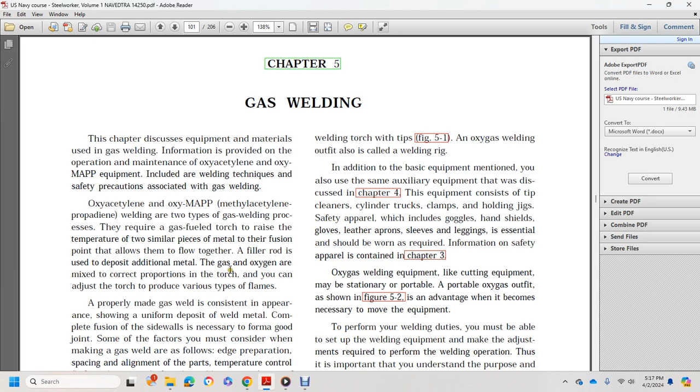You can adjust the torch to produce various types of flames. A properly made gas weld has a consistent appearance showing uniform deposit of welding material with complete fusion, the necessary form of a good joint. Factors to consider when making a gas weld include edge preparation, spacing, alignment of the parts, and temperature control before, during, and after the welding process.

The angle of the torch and position of the tip, filler rod, flame adjustment, and torch manipulation all matter. In some cases flux is needed to remove oxidized slag from molten metal and protect the puddle from atmospheric contamination.

When selecting the joint section for gas welding, the edges of the plate joint are uniformly melted with the heat of the torch. For welding heavier sheets and plates, you have to fill it using filler metal at the edge of the heavier plate, which may be beveled to permit penetration to the base of the joint. Both filler metal and base metal are melted and solidify to form one continuous piece.

For welding light sheet metal, filler metal is usually not necessary. The edges of light sheet metal are flanged at the joint so they flow together to form one solid piece as you melt them. This covers oxy gas welding equipment.

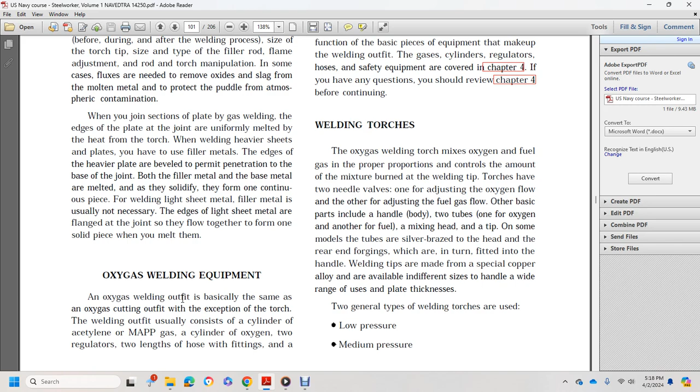An oxy gas welding outfit is basically the same as an oxy gas cutting outfit with the exception of the torch. The welding outfit usually consists of an acetylene gas cylinder, oxygen cylinder, regulators, two lengths of hose with fittings, and a welding torch with tips. An oxy gas welding outfit is called the welding rig.

In addition to the basic equipment, the same auxiliary equipment discussed in chapter 4 is used, consisting of tip cleaners, cylinder trucks, clamps, holding jigs, and safety apparel which includes goggles, hand shields, gloves, aprons, and sleeve leggings. This essential safety apparel and required information is contained in chapter 3.

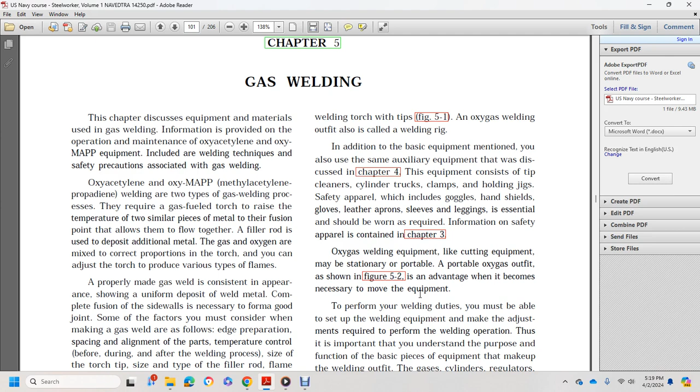Oxy gas welding equipment, like cutting equipment, can be stationary or portable. A portable oxy gas outfit, shown in figure 5.2, is advantageous when it becomes necessary to move the equipment. To perform welding duties, you must be able to set up the welding equipment and make adjustments required to perform welding operations. It's important to understand the purpose and function of the basic pieces of equipment that make up the welding outfit.

Gas cylinders, regulators, hose, and safety equipment are covered in chapter 4. If you have any questions, you should review chapter 4 before continuing.

The welding torch is the oxy gas torch. The welding torch mixes the oxygen and fuel in the proper proportions and controls the amount of the mixture burned at the welding tip. Torches have two needle valves, one adjusting oxygen flow and the other adjusting fuel gas flow.

Other basic parts include the handle, the body with two tubes—one for oxygen, another for fuel—a mixing head, and a tip. Some models have tubes that are silver brazed with the heads and rear end forgings, which are in turn fitted within the handle. Welding tips are made of a special copper alloy available in different sizes to cover a wide range of plate thicknesses.

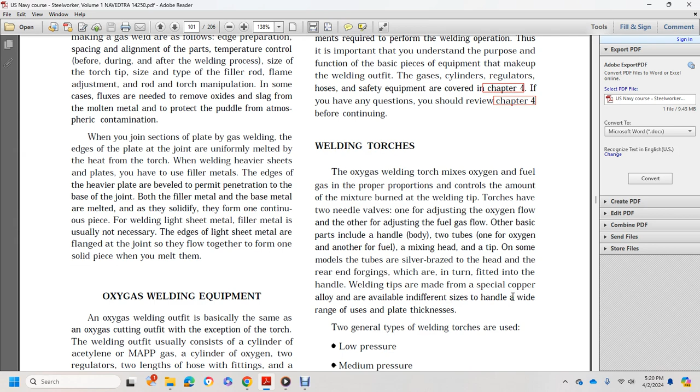There are two general types of welding torches: low pressure and medium pressure.

The low pressure torch is also known as an injector torch. Fuel gas pressure is about 1 psi (pound per square inch), while oxygen pressure ranges between 10 to 40 psi, depending on the size of the torch tip. A jet of relatively high pressure oxygen produces the suction necessary to draw the fuel gas into the mixing head.

Welding tips may or may not have separate injectors in the tip. A typical mixing head of a low pressure, or injector type, torch is shown in figure 5.3.

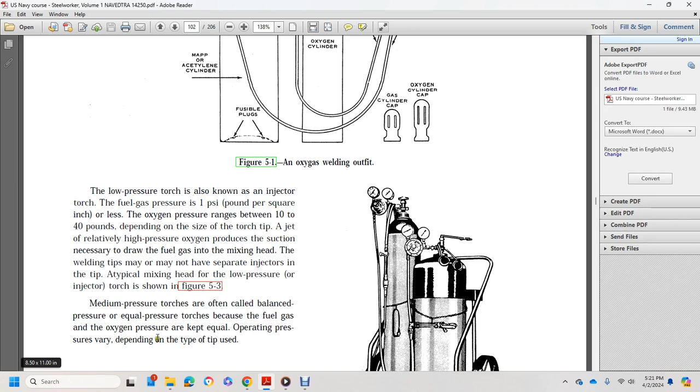Medium pressure torches are often called balanced pressure or equal pressure torches because the fuel gas and oxygen are kept at equal pressure. Operating pressures depend on the type of tips used. Danger: the acetylene fuel gas pressure must never be allowed to exceed 15 psi. Acetylene pressure may become very dangerous between 15 and 29, and self-explosive at 29.4 psi.

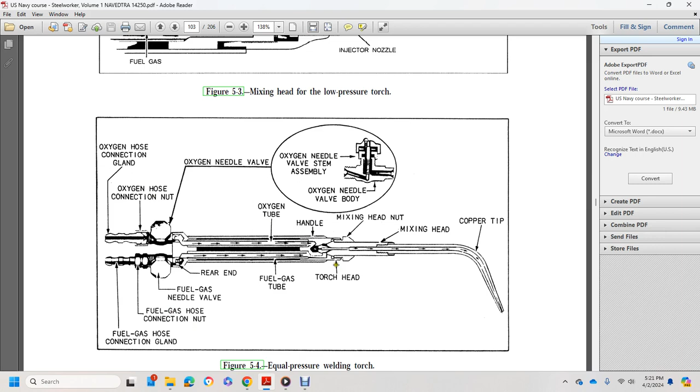Equal pressure welding torch, oxygen connection gland, fuel gas hose connection gland, fuel gas hose nut, oxygen connection nut, fuel gas needle valve, oxygen tube, fuel gas handle, torch head, oxygen needle valve stem, oxygen needle valve body, mixing head nut, mixing head, copper tip.

Typical equal pressure welding torches are called general purpose torches, shown in figure 5.4. The medium pressure torch is easier to adjust than the low pressure torch. With equal pressure gas pressure, you'll be less likely to get flashbacks, which are covered in chapter 4.

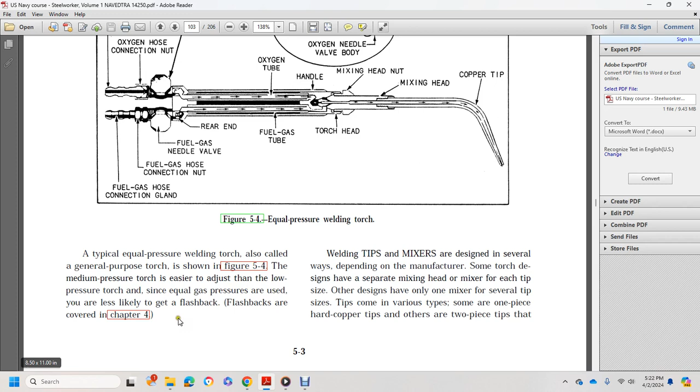Welding tip mixers are designed several ways depending on the manufacturer. Some torch designs use separate mixing heads and mixers for each tip type and size, while other designs have only one mixer for several tip sizes. Tips come in various types: some are one-piece hard copper tips, others are two-piece tips that include an extension tube making the connection between the tip and the mixing head. These removable tips are made of hard copper, brass, or bronze.

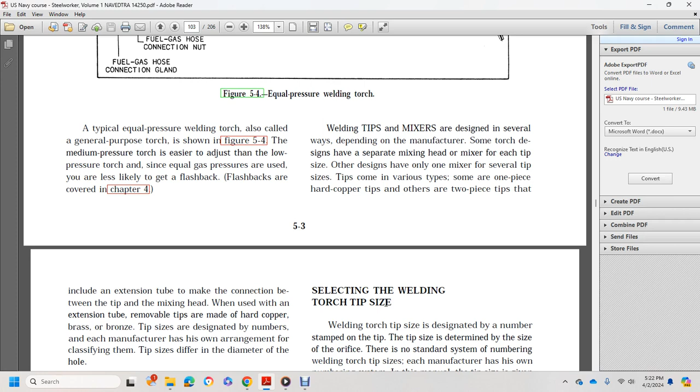Tip size is designated by numbers. Each manufacturer has its own arrangement for classifying them. Tip sizes differ in the diameter of the hole.

Filler rods refer to filler metal used with gas welding and brazing. In certain electrical welding processes, the filler rod is not part of the electrical circuit; its only function is to supply filler metal to the joint.

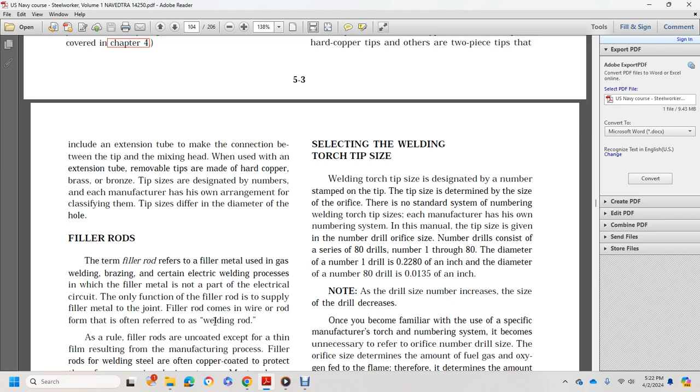Filler rod comes in wire or rod form, but is often referred to as welding rod. As a rule, filler rods are uncoated, except for the thin residue of the manufacturing process. Filler rods for welding steel are often copper coated to protect them from corrosion during storage.

Most rods are furnished in 36 inch lengths, with a variety of diameters ranging from 1/32 inch to 3/8 inch. Rods used for welding cast iron vary from 12 to 24 inches in length and are frequently square rather than round. We determine the rod diameter given the job and the thickness of the metal being joined.

Except for rod diameter, you select the filler rod based on the specification of the metals being joined. Federal, military, and naval specifications apply to all federal agencies, military establishments, or the Navy respectively. Filler metals are presently covered by one or more of these three types of specification.

Eventually all Navy specifications will be rewritten as military specs. For this reason, some of the specifications for welding material presented in this section may subsequently be published as a military rather than a Navy specification.

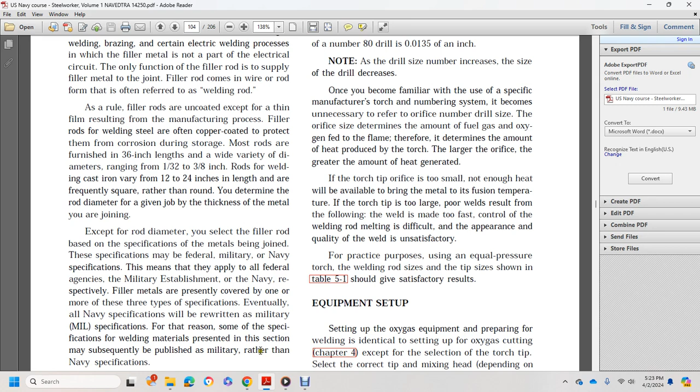Many different types of rods are manufactured for welding ferrous and non-ferrous metals. In general, the welding shop stocks only a few basic types that are suitable for use in all welding positions. These basic types are known as general purpose rods.

Operation and maintenance of oxygas equipment. This section discusses the basic procedures involved in setting up the oxygas equipment, lighting it off, adjusting the flame, and securing the equipment. Information is also provided on the maintenance of oxygas equipment.

On selecting the welding torch tip size: the welding torch tip size is given by the number stamped on the tip, with the tip size determined by the size of the orifice. There is no standard system for numbering welding torch tips; each manufacturer has its own numbering system manual.

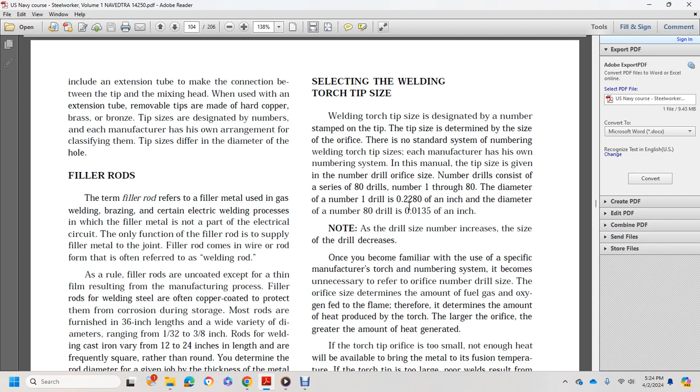Tip size is given by the number of the drill used, and the number of drills consists of a series — for example, an 80 drill series numbers 1 through 80. The diameter of the number 1 drill is 0.2280 inches, while the diameter of the number 80 drill is 0.0135 inch. As the drill size number increases, the size of the drill actually decreases.

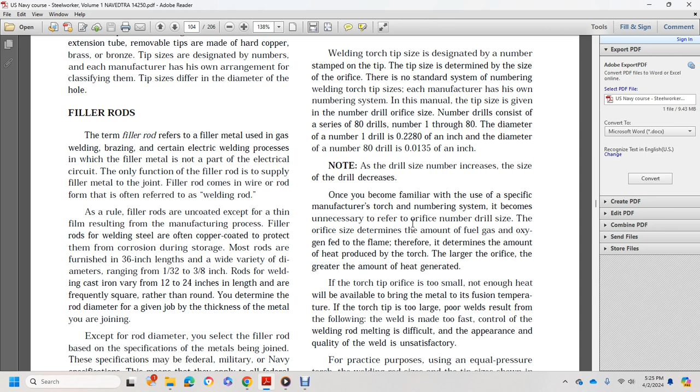Once you become familiar with the use of a specific manufacturer's torches, it becomes unnecessary to refer to orifice number drill size. The orifice number, or drill size of the orifice, determines the amount of fuel gas and oxygen fed to the flame, and therefore determines the amount of heat produced by the torch.

The larger the orifice, the greater the amount of heat generated. If the torch orifice is too small, not enough heat will be available to bring the metal to fusion temperature for the torch tip.

Using too large a tip results in the following: the weld is made too fast for control as the welding rod melts, and the resulting difficulty in appearance and quality of the weld is unsatisfactory.

For practice purposes, using the equal pressure torch with the welding rods and tip sizes shown in table 5.1 will give satisfactory results.

Tighten the assembly and adjust it to the proper angle. After the desired adjustment has been made, tighten the tip. Depending on the type of equipment, some are tightened with a wrench, while other types only require hand tightening as required.

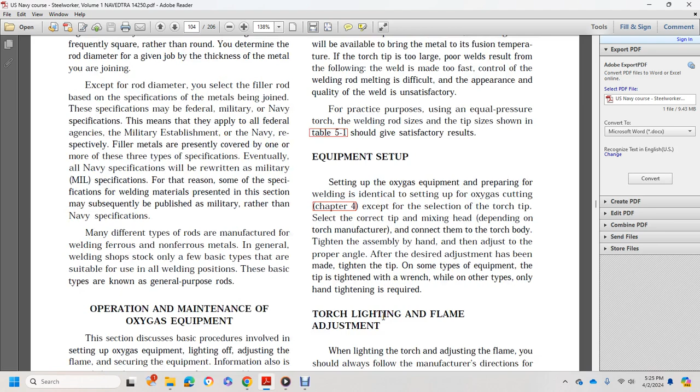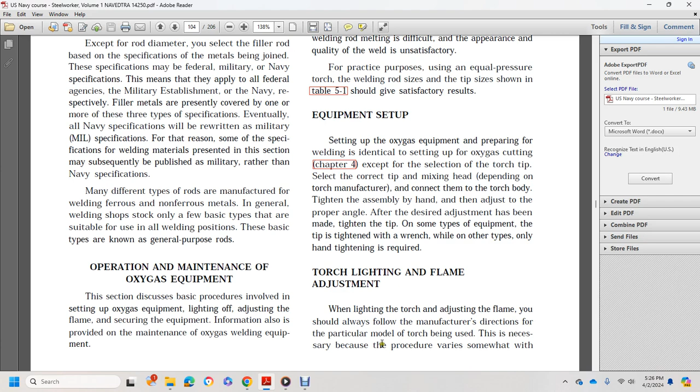Torch lighting and flame adjustment: after lighting the torch, adjust the flame. You should always follow the manufacturer's directions for the particular model of torch being used, since procedures vary somewhat between different types of torches, and in some cases even between different models made by the same manufacturer.

After lighting the torch, adjust the flame according to the type of metal being used and the depth of coverage required. The different types of flames are covered in Chapter 4.

A carbonizing flame is adjusted for welding high carbon steel with a hard-faced weld, while non-ferrous alloys are welded with a neutral flame if the correct flame is used for welding mild steel. The flame produces a molten puddle that is quite clear on the metal, flowing without boiling, foaming, or sparking. Always adjust for the neutral flame before moving to an oxidizing or carbonizing flame mixture.

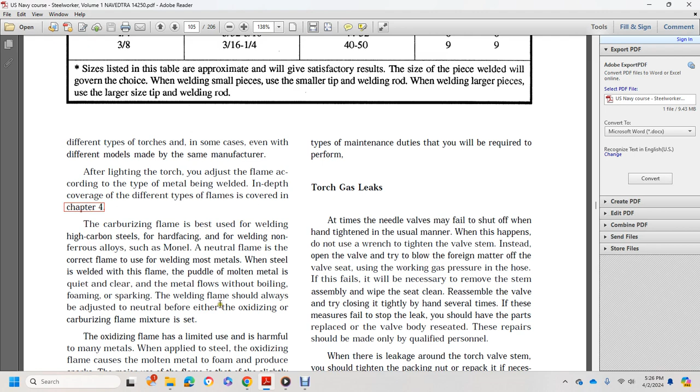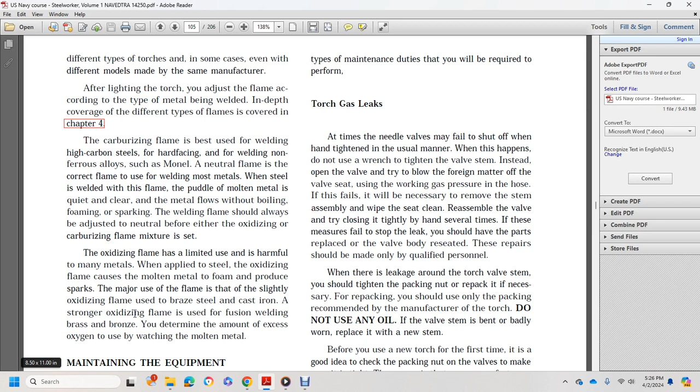An oxidizing flame is limited to use on certain metals, applied to steel, causing the molten metal to foam and spark. The major use is a slightly oxidizing flame for brazing steel and cast iron, while a strong oxidizing flame is used for fusion welding brass and bronze. The amount of excess oxygen used determines how the molten metal is watched.

Maintenance of the equipment: for welding equipment to operate efficiently and give useful life, you must properly perform maintenance and upkeep. Your responsibility for maintaining oxygas welding equipment will not require you to make major repairs.

If major repairs are needed, you are responsible for seeing that the equipment is removed from service and turned into the repair section. You will be briefed on some of the common maintenance duties you will be required to do.

Torch gas leaks: at times needle valves may fail to shut off when hand tightened in the usual manner. When this happens, do not use a wrench to tighten the valve stem. Instead, open the valve and try to blow foreign matter out of the valve seat using working gas pressure in the hose.

If this fails, it will be necessary to remove the stem assembly, wipe the seat clean, reassemble the valve, and try closing it shut tight by hand several times. If this fails to stop the leak, you should have the parts replaced or the valve body reseated. These repairs should be made only by qualified personnel.

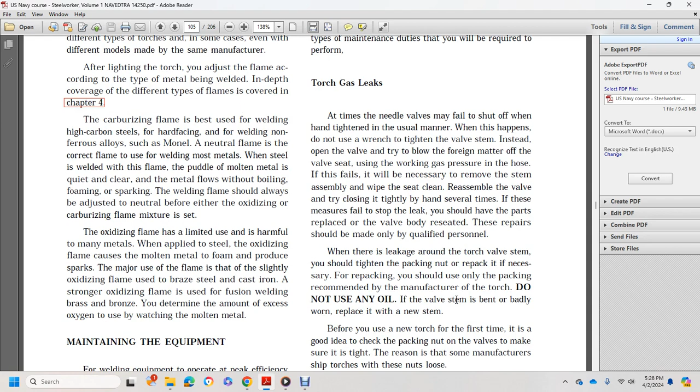When there is leakage around the torch valve stem, tighten the packing nut and repack if necessary. If repacking, use only the packing recommended by the manufacturer, and do not use any oil. If the valve stem is bent or badly worn, replace it with a new stem.

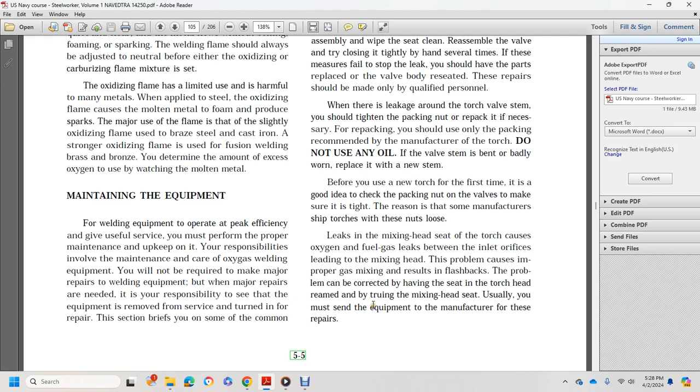Welding tips are subject to considerable abuse and must be kept smooth by cleaning the tip orifice for satisfactory performance. When cleaning the welding tip, you must be careful to ensure that you do not enlarge or scar the orifice.

Carbon deposits or slag must be removed regularly to ensure good performance. Avoid dropping and dragging the tip, because the seat of the joint may be damaged, or the flame end of the tip may be damaged if allowed to come in contact with the welding work or bench. Such failure or damage can roughen the end of the tip and cause the flame to burn with a flickering, unstable appearance.

Some welders prefer to use a number drill sized to the tip orifice to clean the welding tip. The number drill size must be chosen carefully so the orifice is not enlarged, bell-mouthed, reamed out, rounded, or otherwise deformed.

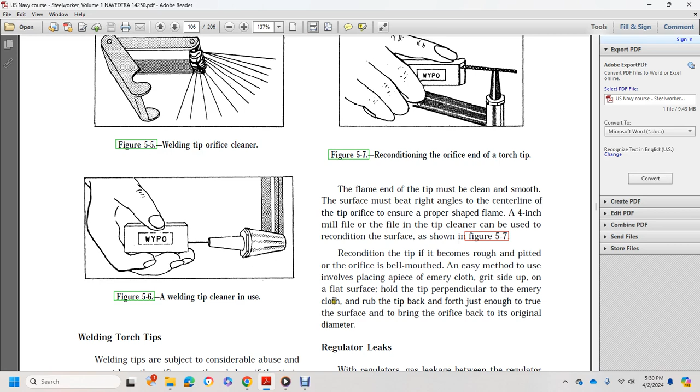Regulator gas leakage occurs between the regulator seat and nozzle. The most common type of trouble is often referred to as regulator creep, where the problem is the pressure gauge gradually rising without moving the adjusting screw.

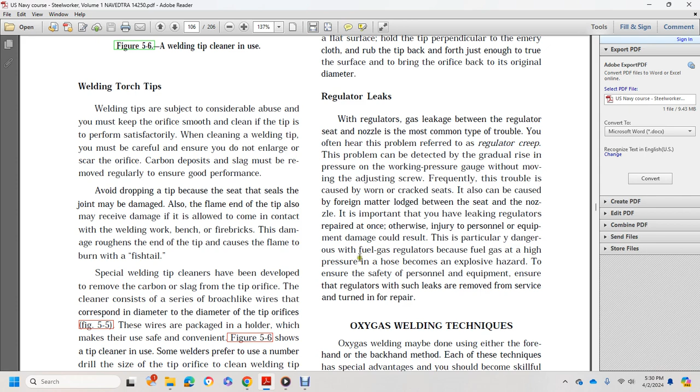Frequently, the trouble is caused by a worn or cracked seat. It can also be caused by foreign matter lodged between the seat and the nozzle. It's important to have leaking regulators replaced promptly, otherwise personal and equipment damage could result, particularly with dangerous fuel gas regulators, because the high pressure fuel gas in the hose becomes an explosive hazard. To ensure the safety of personnel and equipment, regulators with such leaks must be removed from service and turned in for repair.

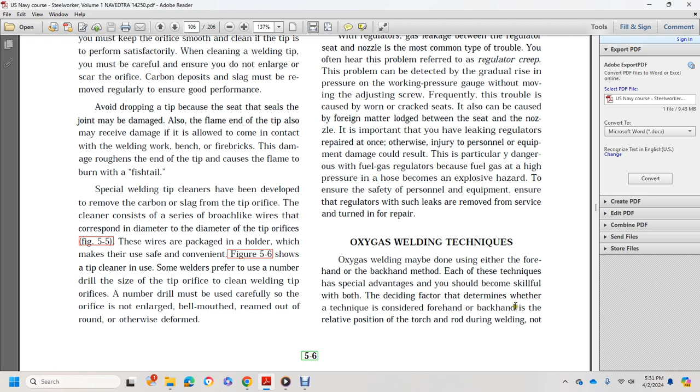Oxy-gas welding techniques: oxy-gas welding is done using either the forehand or backhand method. Each technique has special advantages, and you should become skilled with both. The deciding factor determining whether a technique is forehand or backhand is the relative position of the torch during welding. The direction of the welding pass depends on the type of joint and the position needed to control the parts of the weld.

Forehand welding, shown in figure 5.8, is often called the puddle ripple weld method. The flame is kept ahead of the weld in the direction the weld is being made, with the flame pointing in the direction of travel. The torch tip is held at an angle of about 45 degrees to the work, with the flame positioned to preheat the edge of the weld.

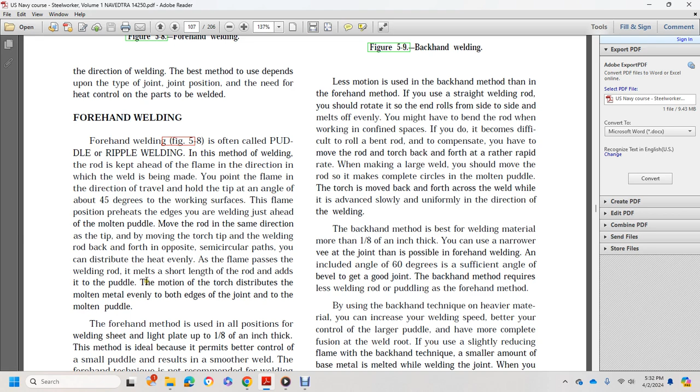Adjust the torch at the bevel and move the rod in the same direction as the tip. The welding rod is moved back and forth in a circular pattern opposite the torch motion, to condition the heat evenly as the flame passes over the weld. Short lengths of rod motion, combined with the torch's motion, distribute the molten metal evenly across both edges of the joint in the molten puddle.

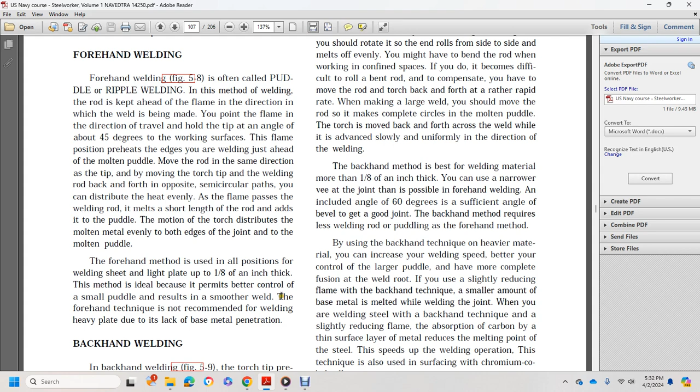In backhand welding, the torch tip precedes the rod in the direction of the weld, with the flame pointing back at the molten metal to complete the weld. The welding tip should make an angle of about 60 degrees with the plate or joint being welded, and the end of the welding rod is placed between the torch tip and the molten puddle.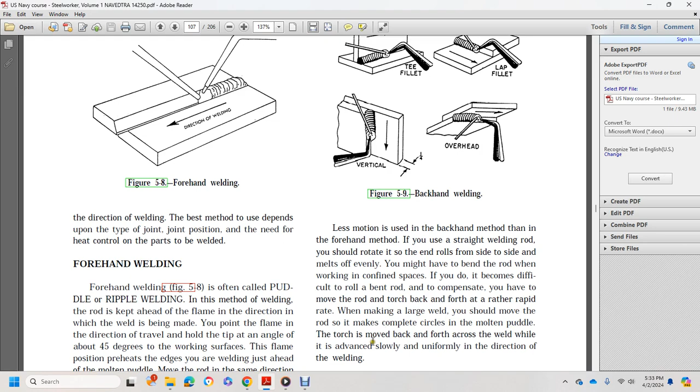The backhand method is best for welding material more than 1/8 of an inch thick. You can use a narrower V at the joint than with forehand welding, with an included angle of 60 degrees, a sufficient angle with a bevel for a good joint. The backhand method requires less welding rod and puddling than the forehand method.

By using the backhand technique with heavier materials, you can improve welding speed with better control of the larger puddle, giving complete fusion of the welding rod.

If you slightly reduce the flame with the backhand technique, a small amount of carbon from the flame is absorbed into the thin surface of the base metal while welding the root joint. This reduces the melting point of the steel and increases the speed of the welding operation. This technique is used in surfacing with chromium-cobalt alloys.

Multi-layer welding is used in order to avoid carrying large molten metal puddles on thick plates and pipe, since large puddles are difficult to control. Concentrate on getting a good weld at the bottom of the V on the first pass, then on the next pass concentrate on getting good fusion on the sides of the V.

With the previous layer as a guide, the final layer is easily controlled, and a smooth surface of the weld has the advantage of refinement. The previous layer's succeeding layers have an effect like heat treating the weld material, allowing one layer to cool to a black heat before it's reheated, improving the ductility of the welded metal. If this added quality is desired for the last layer, an additional succeeding layer is deposited and then machined off.

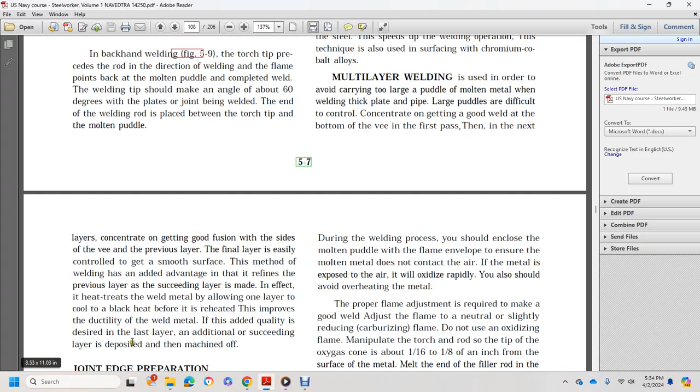Joint edge preparation: sheet metal is easily melted and does not require special edge preparation. For welding operations involving plate, joint edge preparation and proper spacing between edges are important factors. The thickness of the plate determines the amount of edge preparation required.

Square edges can be butted together and welded. You can use this type of joint on plate up to 3/16 of an inch thick, and for plate from 3/16 to 1/4 of an inch thick a slight root opening between the parts is necessary to achieve complete penetration.

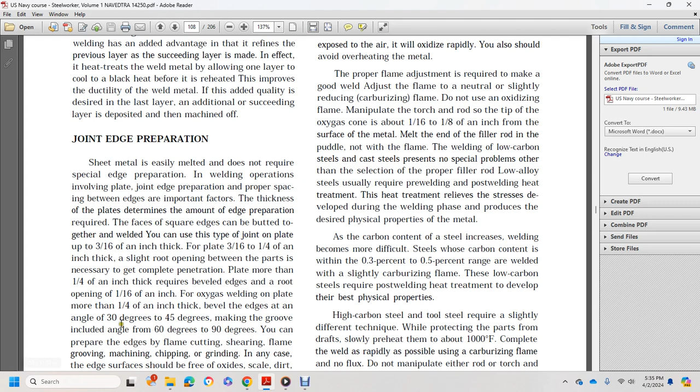Plate more than 1/4 inch thick requires beveled edges with a root opening of 1/16 of an inch for oxy-gas welding. Bevel the edges at an angle of 30 to 45 degrees, making a groove with an included angle of 60 to 90 degrees. You can prepare the edge by flame cutting, shearing, flame grooving, machining, chipping, or grinding.

The edge surface must be free of oxide scale, dirt, grease, or other foreign matter. Plate of 3/8 to 1/2 inch thick can be welded from one side only, but thicker sections should be welded with edges prepared on both sides.

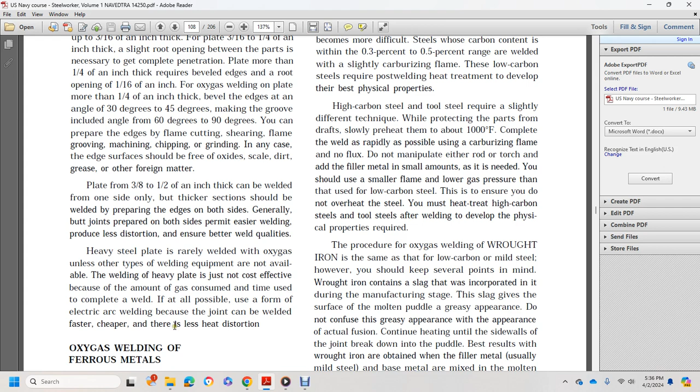Generally, butt joints should be prepared on both sides to permit easier welding, produce less distortion, and ensure better weld quality. Heavier steel plate is rarely welded with oxy-gas unless other types of welding equipment are not available, and welding heavy plate is not cost effective because of the amount of gas and time consumed for a complete weld. Electrical arc welding is preferred because the joint can be welded faster, cheaper, and with less distortion.

Oxy-gas welding of ferrous metals: low carbon steels, low alloy steels, cast steel, and wrought iron are easily welded by the oxy-gas process. Flux is not necessary when the metal's oxide melts at a lower temperature than the base metal.

During the welding process, you can cover the molten metal with a flame envelope to ensure the molten metal does not contact the air. If the metal is exposed to the air, it will oxidize rapidly and overheating of the metal should be avoided.

Proper flame adjustment is required to make a good weld. Adjust the flame to neutral or slightly reducing carburizing flame; do not use an oxidizing flame. Manipulate the torch to hold the inner cone 1/16 to 1/8 inch from the surface of the metal, and keep the end of the filler rod in the puddle, not in the flame, while welding.

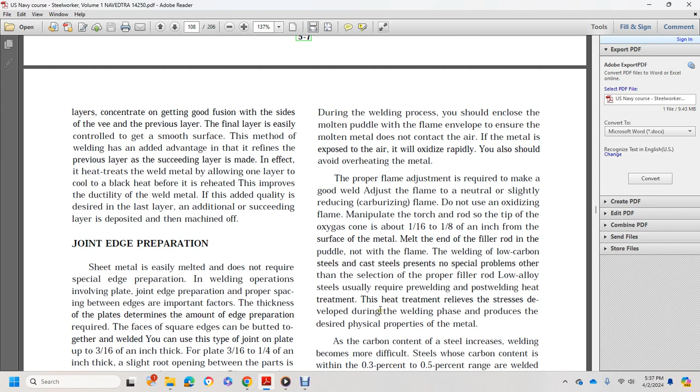Low carbon steel presents no special problems in the selection of the proper filler rod. Low alloy steel usually requires pre-welding and post-welding heat treatment. The heat treatment will relieve the stress that develops during welding and produces the desired physical properties of the metal. As the carbon content of the steel increases, welding becomes more difficult.

Steel whose carbon content is within 0.3% to 0.5% range is welded with a slightly carburizing flame. Low carbon steels will most often require post-welding heat to develop the physical properties. High carbon steel tools require a slightly different technique, protecting the parts from drafts.

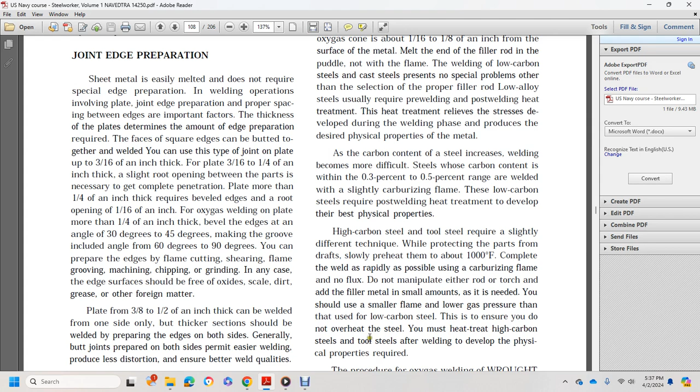Slowly preheat them to about 1000 degrees and complete the weld as rapidly as possible, using a carburizing flame with no flux. Do not manipulate either the rod or torch; add filler metal in small amounts as needed. Use a smaller flame and lower gas pressure than that used for low carbon steel to ensure you do not overheat the steel. You must heat treat high carbon steel tools after welding to develop the physical properties required.

The procedure for oxygas welding wrought iron is the same as for low carbon mild steel; however, you should keep several points in mind. Wrought iron steels contain slag that was incorporated during the manufacturing stage. This slag gives the surface of the molten puddle a greasy appearance. Do not confuse this greasy appearance with the appearance of actual fusion.

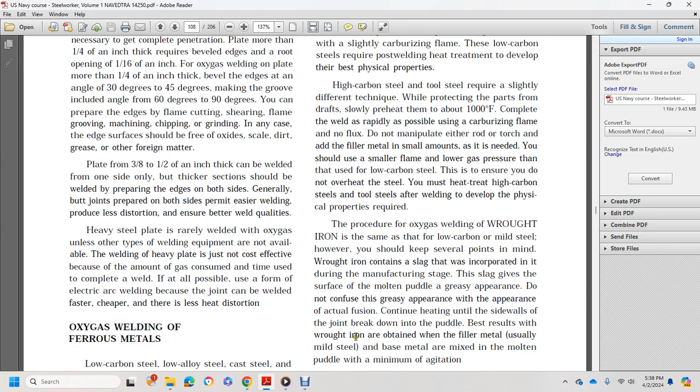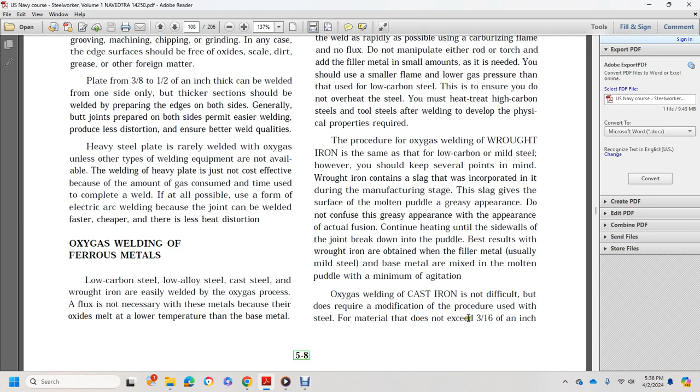Oxygas welding of cast iron is not difficult, but it does require a modified procedure compared to steel. For material not exceeding 3/16 of an inch thick, you do not make a V-groove. Metal between 3/16 and 3/8 of an inch thick should have a single V-butt joint with an included angle of 60 degrees. For more than 3/8 of an inch thick, use a double V joint with a 60-degree angle.

Add filler by directing the inner cone of the flame against the rod instead of dipping the tip into the puddle. Filler metal should be deposited in layers not exceeding 1/8 of an inch thick. Upon completion of the weld, you must stress relieve the weldment by heating it to a temperature between 1100 and 1150 degrees Fahrenheit, then cooling it slowly. Oxygas welding of cast iron gives a good color match and good machinability.

However, the color match is not essential. Cast iron repairs can be made more easily and economically by braze welding.

Oxy-gas welding can be used with chromium, nickel, and stainless steels. As a rule, oxy-gas welding is used only on light sheet; heavier pieces of steel are usually joined by one or more of the electrical arc welding processes. For material 20 gauge, or 4/100 of an inch, or less in thickness, a flange equal to the thickness of the metal is turned up, then welded without filler metal.

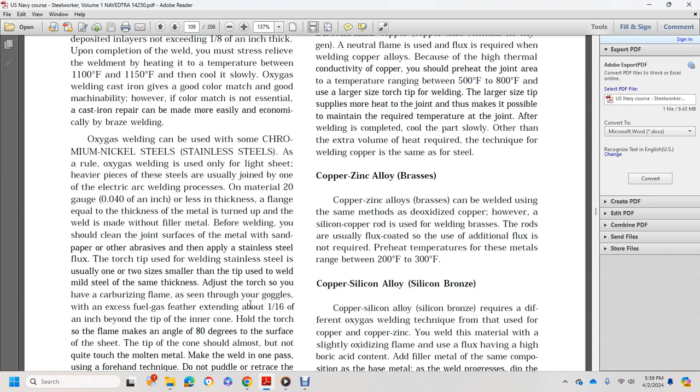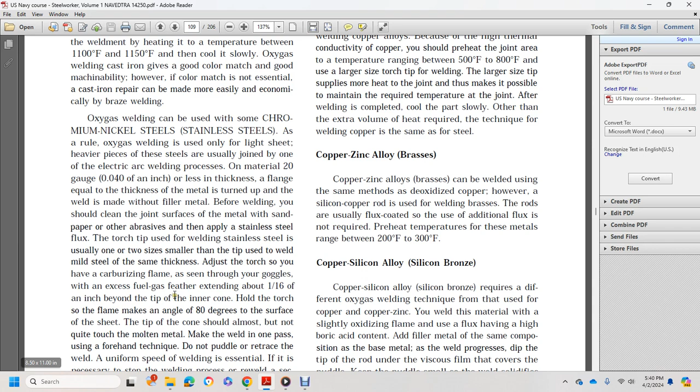Hold the torch so the flame makes an angle of about 80 degrees with the surface of the sheet. The tip of the cone should almost but not quite touch the molten metal. Make the weld in one pass using the forehand technique. Do not puddle or retrace the weld; a uniform speed of welding is essential.

If it becomes necessary to stop the welding process, wait until the entire weld has cooled before you reweld the section.

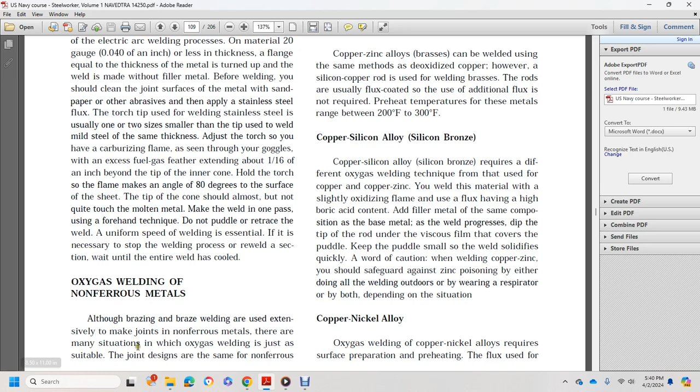Pure copper can be welded using an oxygen torch. High joint strength requires either deoxidized copper that contains no oxygen, using a neutral flame and the flux required.

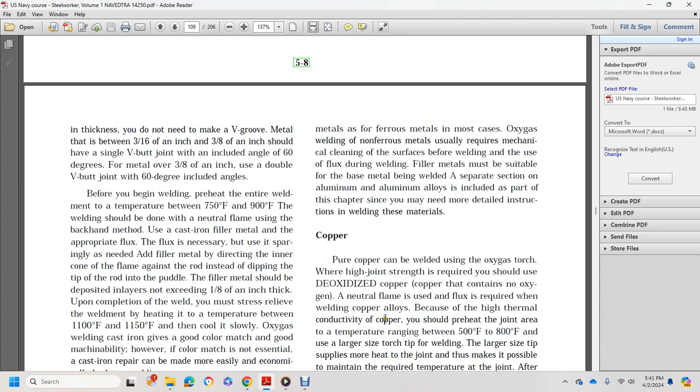When flame welding copper alloys with higher thermal conductivity, preheat the joint area to a temperature ranging from 500 to 800 degrees Fahrenheit. Use a large welding torch with a large size tip to supply more heat to the joint, as needed to maintain the required temperature. After welding is complete, cool the part slowly, given the extra volume of heat required.

The technique for welding copper is the same as for steel.

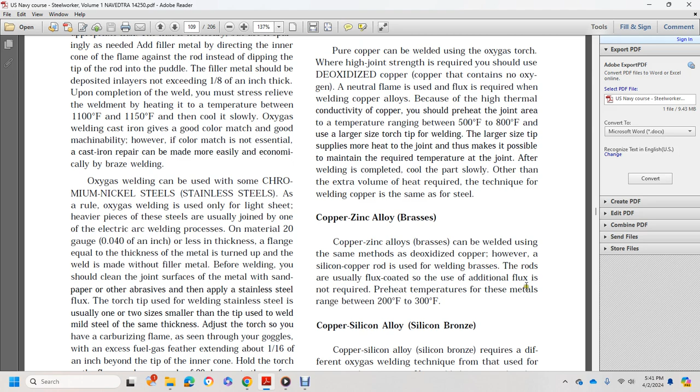Copper silicon alloy, silicon bronze, requires a different oxy-gas welding technique than that used for copper and copper zinc. Weld the material with a slightly oxidizing flame using flux with a high boric acid content, and additional filler metal with the same composition as the base material.

As the weld progresses, dip the tip of the rod under the viscous film that covers the puddle. Keep the puddle small and allow the weld to solidify quickly.

Word of caution: when welding copper zinc, safeguard against zinc poisoning by doing all welding outdoors, wearing a respirator, or both, depending on the situation.

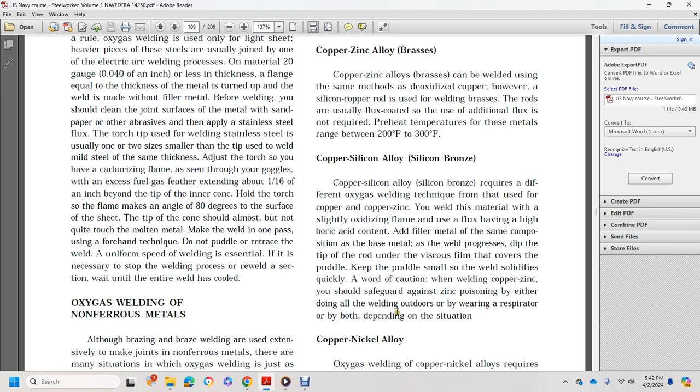Copper nickel alloy. Oxy-gas welding copper nickel alloys requires surface preparation and preheating. The flux used for this welding is made into a paste and applied with a brush to all parts of the joint and the welding rod.

Keep the end of the filler rod within the protective envelope of the flame, adding filler metal without disturbing molten metal over the welded metal. If possible, run the weld from one end of the joint to the other without stopping.

After completing the weld, cool the part slowly. Remove remaining traces of flux with warm water.

High nickel alloys. Gas welding nickel alloys is similar to copper nickel alloys. Good mechanical cleaning of the joint surface is essential for the joint design, basically the same as steel with equivalent thickness. The included angle of the V-bevel joints at approximately 75 degrees.

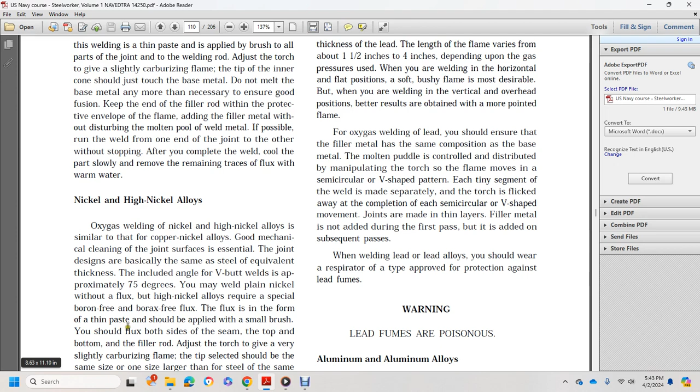You may weld plain nickel without flux, but high nickel alloys require a special boron-free, borax-free flux, formed into a thin paste and applied with a small brush to both sides of the seam, at the top and bottom, and to the filler rod.

The torch should give a very slight carburizing flame; the tip size should be one size larger than used for steel of the same thickness. The flame should be softer, with the tip of the cone kept in contact with the molten pool.

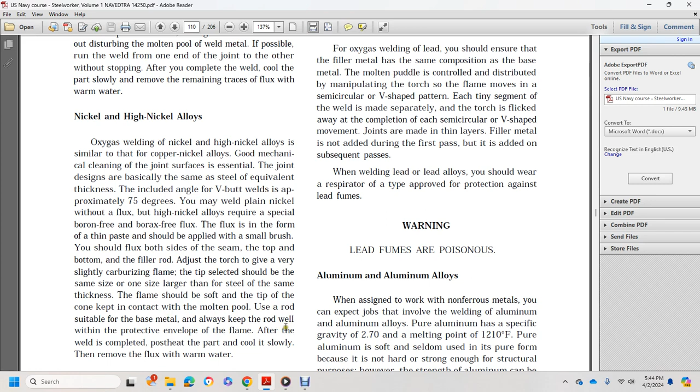Use a rod suitable for the base material, always keeping the rod within the protective envelope of the flame. After the weld is completed, post-heat the part and cool it slowly, then remove the flux with warm water.

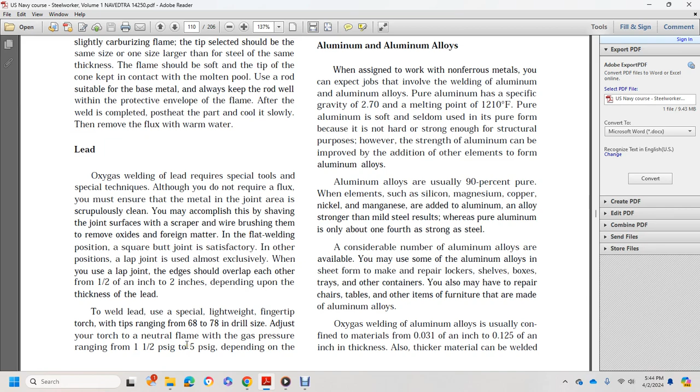To weld lead, use a special lightweight fingertip torch with a tip ranging from 68 to 78 in drill size. Adjust the torch to a neutral flame with gas pressure ranging from 1.5 psi to 5 psi gauge, depending on the thickness of the lead. The flame length varies from about 1 1/2 inches to 4 inches, depending on the gas pressure used.

When welding in the horizontal flat position, a soft bushy flame is most desirable, but when welding in the vertical or overhead position, better results are obtained with a more pointed flame.

For oxy-gas welding lead, ensure that the filler metal is the same composition as the base metal. The molten puddle is controlled and distributed by manipulating the torch flame in a semicircular, V-shaped pattern.

Each tiny segment of the weld is made separately, with the torch flicked out of the way upon completion of each semicircular or V-shaped movement. Joints are made in thin layers; filler metal is not added during the first pass, but is added on subsequent passes.

When welding lead alloy, wear a respirator type of protection against lead fumes. Warning: lead fumes are poisonous.

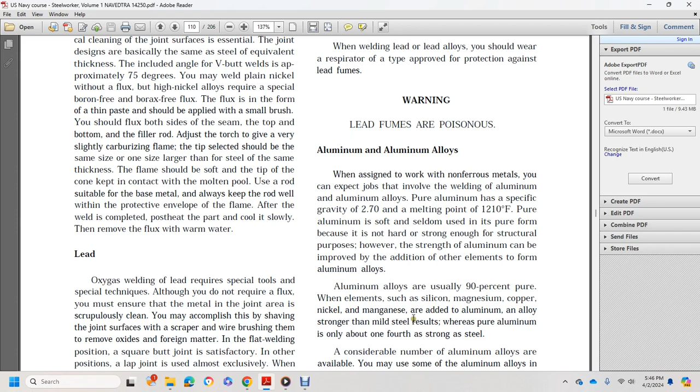However, the strength of aluminum can be improved by adding other elements to form aluminum alloys. Aluminum alloys use 90% pure aluminum, with silicon, magnesium, copper, and nickel added to make the aluminum alloy stronger than mild steel. But pure aluminum is only about 1/4 as strong as steel.

A considerable number of aluminum alloys are available. You'll use aluminum alloy sheet to make and repair locker shelves, boxes, and trays, and other containers. You may also have to repair chairs, tables, and other furniture made of aluminum alloy, using oxygas aluminum welding.

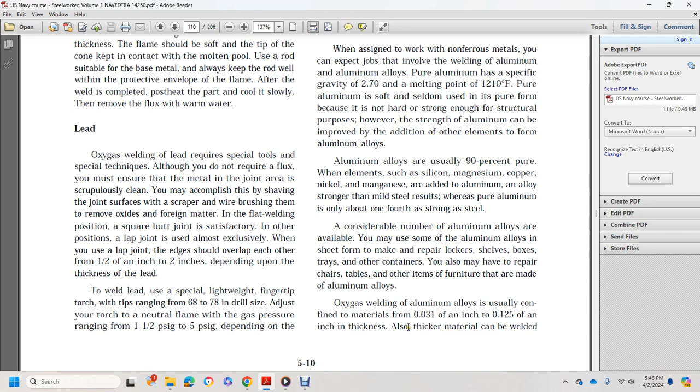Aluminum alloys usually come in material thicknesses of 31 thousandths of an inch to 125 thousandths of an inch. Thicker material can also be welded by the oxygas process if necessary, however the thinner material is usually spot and seam welded.

Melting characteristics: before attempting to weld aluminum alloy for the first time, you should become familiar with how the metal reacts when under a welding flame.

A good example of how aluminum reacts to heat can be seen if you place a small piece of sheet aluminum on the welding table. Heat a neutral flame, hold it perpendicular to the surface of the sheet, bringing the tip of the inner cone almost in contact with the metal. Observe how almost without warning the metal suddenly melts and runs away, leaving a hole in the sheet.

Now repeat the operation with the torch held at an angle of about 30 degrees to the plane surface. With a little practice, you will be able to melt the surface of the metal without forming a hole. Now try to move the flame slowly along the surface of the sheet, melting a small puddle, and observe how quickly the puddle solidifies when the flame is removed. Continue this practice until you're able to control the melting.

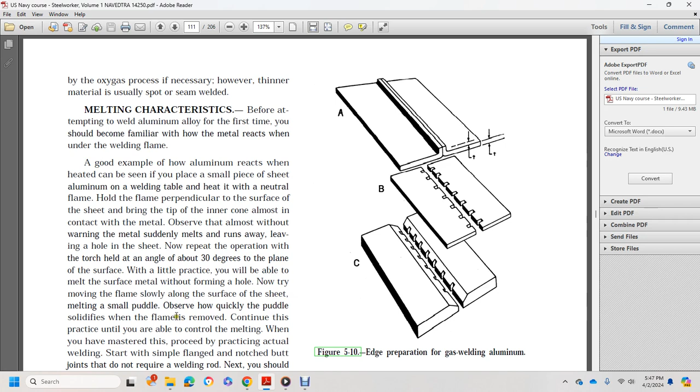When you have mastered this, proceed to practicing actual welding. Start with a simple flange or notched butt joint, which does not require welding rod. Next, you should try using welding rod on thin sheet, then on castings.

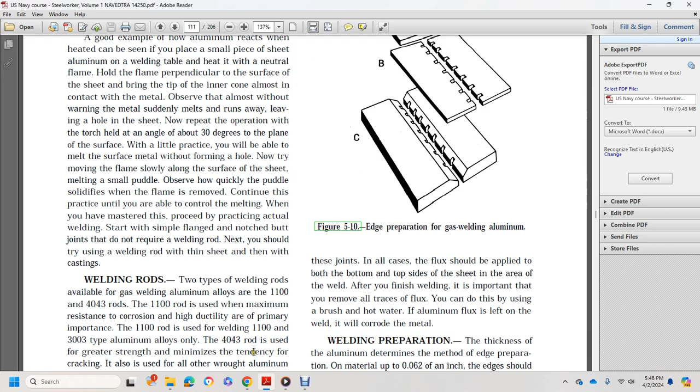Welding rods: there are two types of alloy welding rods for gas welding aluminum, the 1100 rod and the 4043 rod. The 1100 rod, due to its maximum resistance to corrosion and high ductility, is of primary importance and is used for welding 1100 and 3003 type aluminum alloys. The 4043 rod is used for greater strength and to minimize the tendency for cracking, and is also used with all other aluminum alloys and castings.

Welding fluxes: the use of the proper flux in welding aluminum is extremely important. Aluminum welding flux is designed to remove aluminum oxide by chemically binding it, since in gas welding this oxide forms rapidly on the molten metal and must be removed, or a defective weld will result.

To ensure proper distribution, you should paint the flux onto the welding rod and onto the surface to be welded. Aluminum flux, usually in powder form, is prepared by mixing with water to form a paste, and the paste should be kept in an aluminum, glass, or earthenware container, because steel and copper containers tend to contaminate the mixture.

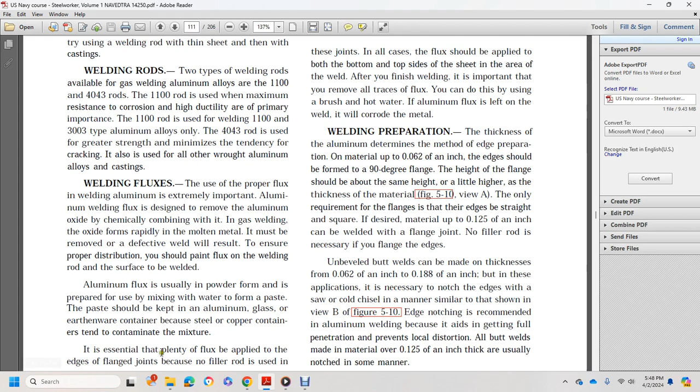It is essential that the welding flux be applied to the edges of flange joints, because no filler is used in these joints. In all cases, the flux should be applied with a brush to both sides of the sheet in the area of the weld.

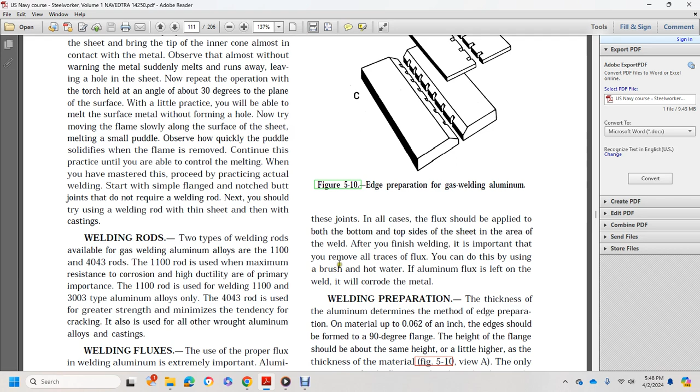After finishing the weld, it is important that you remove all traces of flux. You can do this by brushing with hot water, since aluminum flux left on the weld will corrode the metal.

Welding preparation: the thickness of the aluminum determines the method of edge preparation. For material of 62 thousandths of an inch, the edge should be formed at a 90-degree flange. The height of the flange should be about the same as, or a little higher than, the thickness of the material, as shown in view A. The only requirement of the flange is that the edge be straight and square.

Material up to 1/8 of an inch thick can be welded with a flange joint, and no filler rod is necessary if you flange the edges. This shows view A and B, edge preparation for gas welding aluminum.

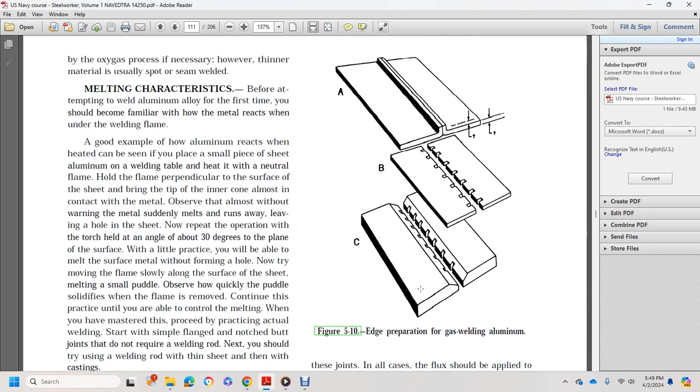Unbeveled butt welds can be made in thicknesses of 62 thousandths to 188 thousandths of an inch, but in this application it is necessary to notch the edges with a cold chisel, in a manner similar to that shown in view B. Edge notching is recommended in aluminum welding because it aids in getting full penetration and prevents local distortion. All butt welds made in material over 125 thousandths of an inch thick are usually notched in some manner.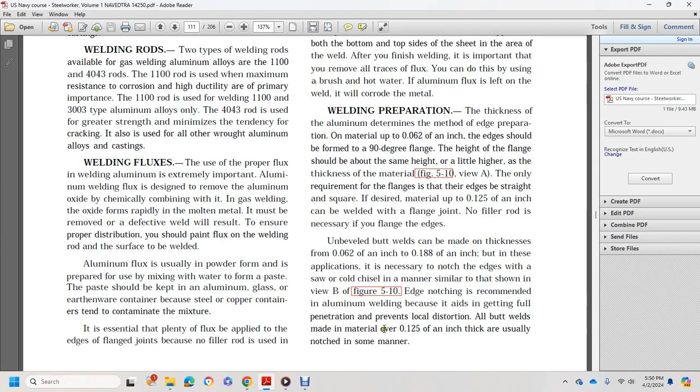When welding aluminum more than 188 thousandths of an inch thick, bevel the edges and notch them, as shown in view C of figure 5-10, with an included bevel angle of 90 to 120 degrees.

After you prepare the edges of the piece properly, clean the surfaces to be welded. For heavy oxide present on the metal surface, you may have to use a stainless steel wire brush. Dirt, grease, and oil can be removed by wiping the weld area with a soaked rag.

Aluminum plate a quarter inch thick or greater should be preheated at a temperature ranging between 500 and 700 degrees Fahrenheit. This aids in avoiding heat stress and also reduces fuel and oxygen requirements during actual welding.

It's important that preheating temperature does not exceed 700 degrees Fahrenheit. If the temperature goes above 700, the aluminum alloy may be severely weakened. High temperatures also cause large aluminum parts to collapse under their own weight.

Thin material should be warmed through with the torch before welding. This slight preheat helps to prevent cracks.

Scrape the rod over the surface at 3 to 4 second intervals, permitting the rod to come clear of the flame. Each time you leave the rod under the flame too long, it melts before the parent metal does. The scraping action indicates when you can start welding without overheating the metal.

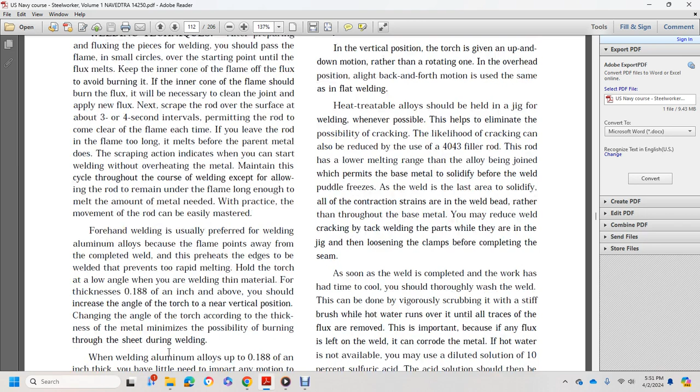Forehand welding is usually preferred for welding aluminum alloys because the flame points away from the completed weld, which preheats the edge to be welded and prevents too rapid melting.

Hold the torch at a low angle when welding thin material; for thicknesses of 188 thousandths of an inch or above; you should increase the angle of the torch to near vertical position. Changing the angle of the torch according to the thickness of the metal minimizes the possibility of burning through the sheet during the weld.

When welding aluminum alloys of 188 thousandths of an inch thick or less, you have little need to impart any motion to the torch other than moving it forward along the flange.

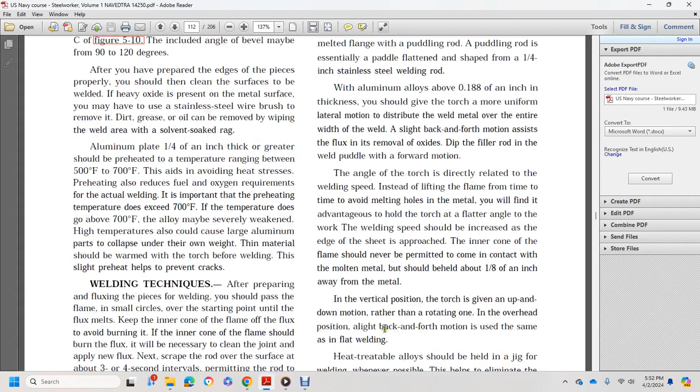With aluminum alloys above 188 thousandths of an inch in thickness, give the torch a more uniform lateral motion to distribute the weld metal over the entire width of the weld. A slight back and forth motion assists the flux and helps remove the oxides.

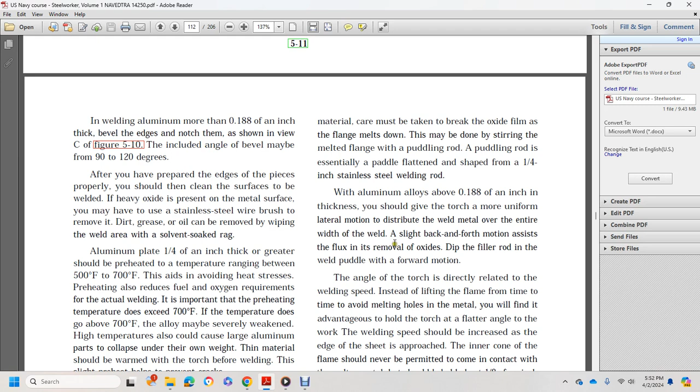Dip the filler rod in the welding pool during the forward motion. The angle of the torch is directly related to welding speed. Instead of lifting the flame from time to time to avoid melting holes in the metal, you will find it advantageous to hold the torch at a flatter angle to the work.

Welding speed should be increased as the edge of the sheet is approached. The inner cone of the flame should never be permitted to come in contact with the molten metal, but should be held about 1/8 of an inch away from the metal.

In vertical position, the torch is given an up-and-down motion rather than a rotating one. In the overhead position, a slight back and forth motion is used the same as in flat welding.

Heat treatable alloy should be held with a jig for welding whenever possible, which helps eliminate the possibility of cracking. The likelihood of cracking can also be reduced by using a 4043 filler rod.

This rod has a lower melting range than the alloy being joined, which permits the base metal to solidify before the weld puddle freezes. As the last welded area solidifies, all contraction strains are taken up in the weld bead rather than throughout the base metal. You may further reduce weld cracking by tacking welding parts while they are in a jig, then loosening the clamps before completing the seam.

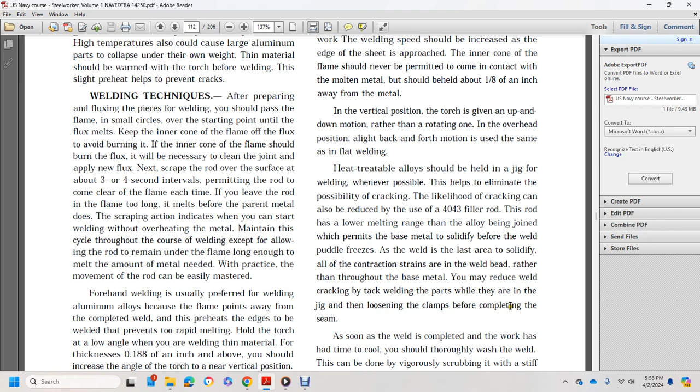As soon as the weld is completed and the work has had time to cool, you should thoroughly wash the weld. This can be done by vigorously scrubbing it with a stiff brush while water runs over it until all traces of the flux are removed. This is important because if any flux is left on the weld, it can corrode the metal.

If hot water is not available, you may use a diluted solution of 10% sulfuric acid. The acidic solution should then be washed off with cold, fresh water after use.

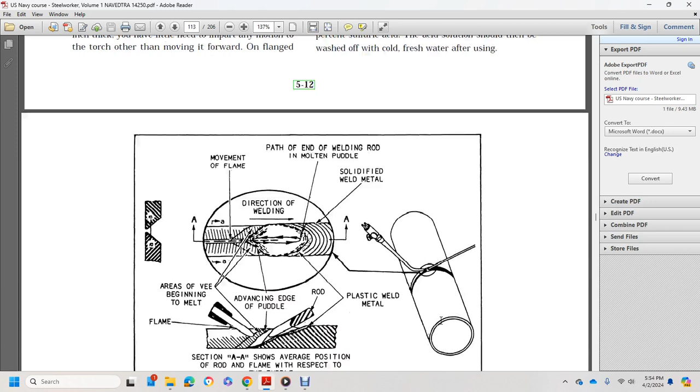This shows the welding operation backhand technique. Section A-A shows the average position of the rod flame in the puddle, respecting the area being welded, the V being melted, direction of weld, movement of the flame, and advancing puddle. Part of the end of the welding rod is in the molten pool, with solidified weld metal and areas beginning to melt as the plastic weld metal flame forms.

Fusion welding pipe. In oxygas welding of pipe. Many tests have proven that fusion welding pipe joints, properly made, are as strong as the pipe itself. For success in oxygas welding of pipe, three essential requirements must be met.

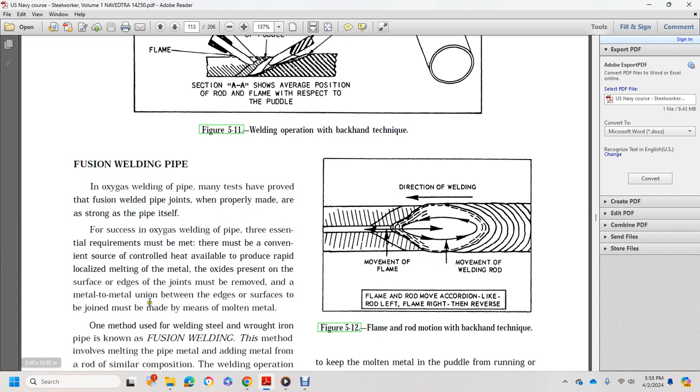One method for welding steel and wrought iron pipe is fusion welding. This method involves melting the pipe and adding metal from the rod, of similar composition, with the welding operation performed at the top of the joint.

Horizontal pipe shown diagrammatically in Figure 5-11. This shows the backhand weld technique, where the rod and flame are moved alternately toward and away from each other, as shown in Figure 5-12.

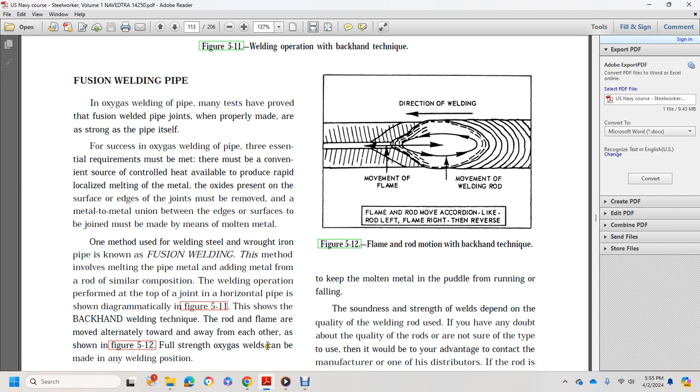Full strength oxygas welds can be made in any weld position. Cohesiveness of the molten metal, along with the pressure of the flame, supports the weld metal, with manipulation of the rod combined to keep the molten metal in the puddle from running and falling.

Figure 5-12 shows the flame and rod motion for the backhand technique and direction of the weld, including movement of the welding rod and movement of the flame.

Soundness and strength of the weld depends on the quality of the welding rods used. If you have any doubt about the quality of the rods, or are unsure of the type used, it would be to your advantage to contact the manufacturer or one of the distributors, if the rod is supplied through the federal stock system. Supplier personnel should be able to look up the information based on the federal stock number of the rod.

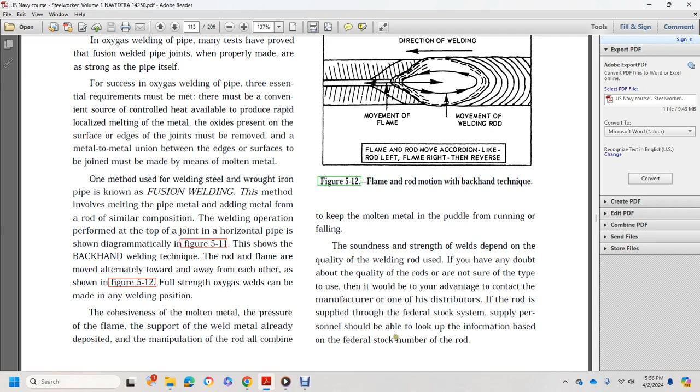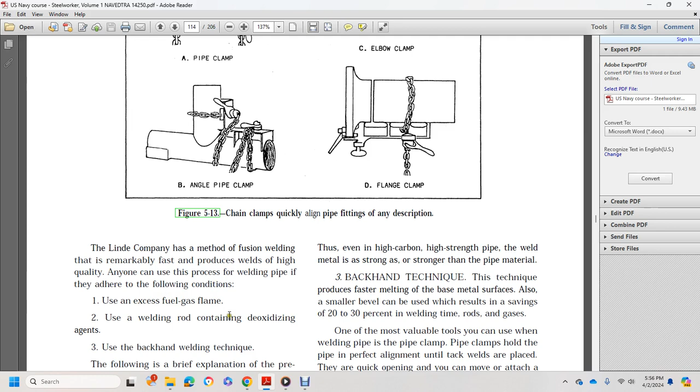The Linde Company has developed a method of fusion welding with remarkably fast, precise welds of high quality. Anyone using this process for welding pipe should adhere to the following conditions: use excessive fuel gas flame, use a welding rod containing a deoxidizing agent, and use the backhand welding technique.

A brief explanation of these conditions: with excessive fuel gas flame, the base metal surface reaches white heat and absorbs carbon from the excessive fuel gas flame. This absorption of carbon lowers the melting point of the steel, allowing the surfaces to melt at faster speeds during the welding action.

Second, the special welding rod deoxidizing agent recommended with the rod eliminates impurities and prevents excessive oxidation of the carbon. Without this action, considerable carbon, and thus the most valuable strength element of the steel, would be lost. As a result, even in higher carbon and higher strength pipe, the weld metal remains stronger than the pipe material.

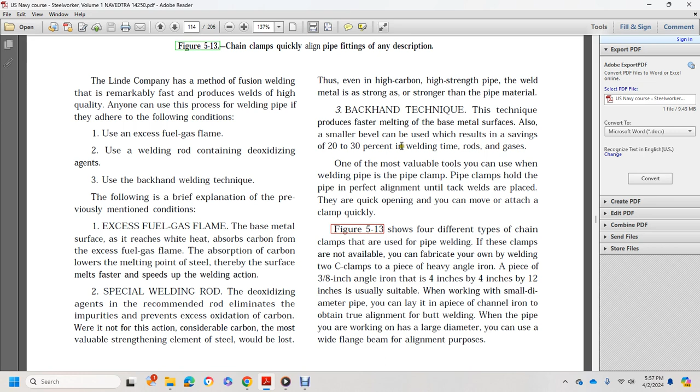Third, the backhand technique produces faster melting of the base metal surface, allowing a smaller bevel to be used. The result is a savings of 20-30% in welding time, rods, and gases.

One of the most valuable tools for pipe welding is the pipe clamp. Pipe clamps hold the pipe in perfect alignment while tack welds are put in place. They are quick to open and can be moved and attached quickly. Figure 5-13 shows four different types of chain clamps used in pipe welding.

If these clamps are not available, you can fabricate your own by welding two C-clamps to a piece of heavy angle iron. A piece of 3/8 inch angle iron, 4 by 4 inches by 12 inches, is easily suitable.

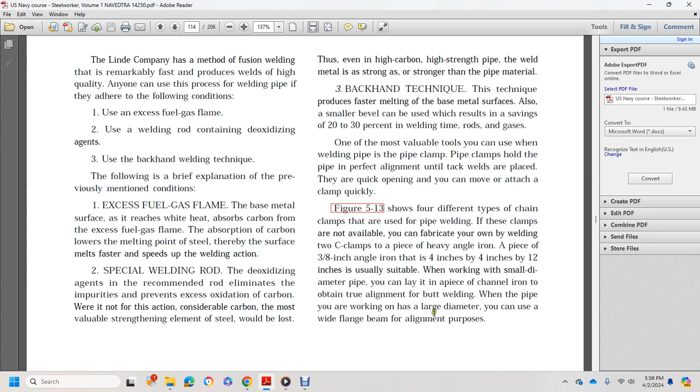When working with small diameter pipe, you can lay it in a piece of channel iron to obtain true alignment for the butt weld. When working with large diameter pipe, you can use a wide flange beam for alignment purposes.

Chapter 6: Soldering, brazing, braze welding, and wear facing.